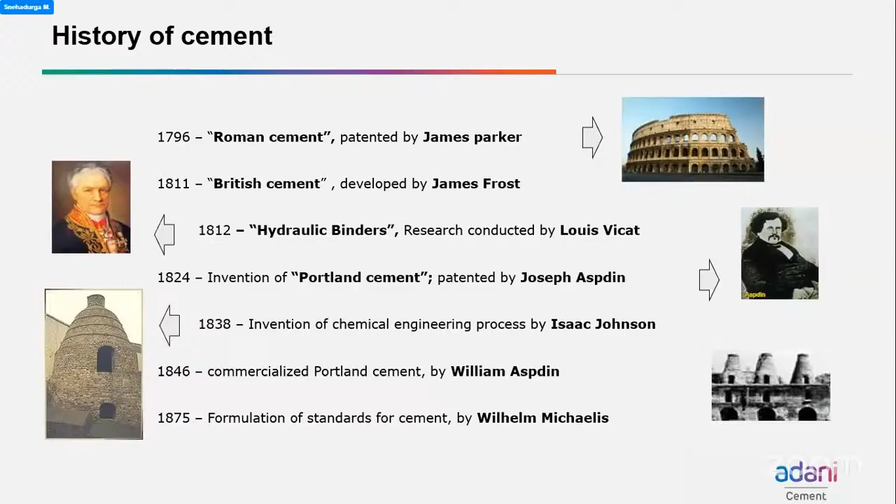Till that time, there was no proper color, no proper setting time, no proper strength, no uniformity. So after 1875, with the formulation for cement, they made some standardization for setting time, strength, color—everything was standardized.

After that, in 1830, they used vertical kilns. Again, in 1885, the rotary kiln was introduced, which used a wet process. Then in 1930, a long rotary kiln was used, also a wet process. Till that time, it was only the wet process.

Again, in 1970, there was a real change to what we personally use in cement today. This real change, or overall process change, happened in 1970 because the short rotary kiln and preheater were introduced—preheater in the dry process. Till that time, they used the wet process, semi-wet process, or dry process. The preheater was introduced, and I'll tell you the advantage of the preheater in upcoming slides.

So before that, we saw this process and the developing technology for cement manufacturing. In the 1900s, they used the wet process with a long rotary kiln, with chains inside the kiln to improve heat exchange. Then after that, almost in the 1950s, they introduced the semi-dry process, and in 1980 they went for a semi-wet process. After that, the dry process was introduced, converting from long rotary to short rotary, and they also introduced the preheater.

The preheater was introduced in 1970, and at that time they used 4 to 6 preheaters before burning any raw materials. For example, if the material is 100% wet condition, burning it directly to dry would require more energy. To optimize the energy, they used the preheater.

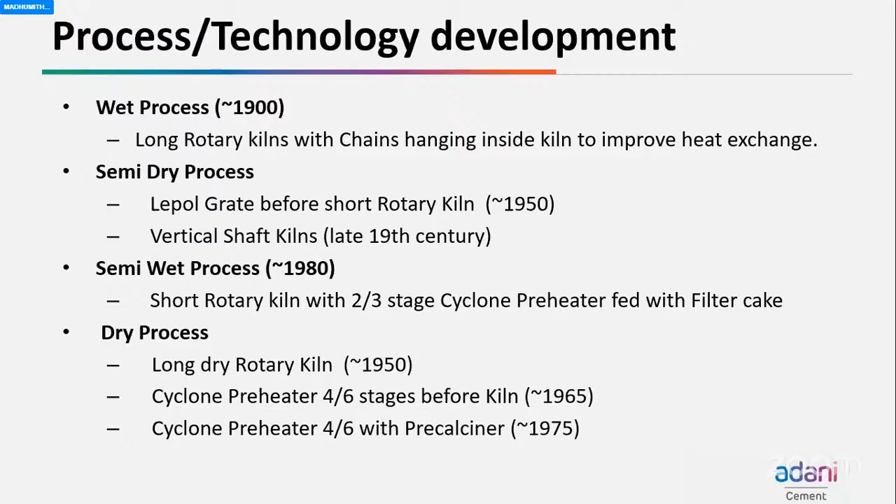The simple process: we take limestone from mining and crushing, then mix clay or bauxite, followed by grinding. The burning of limestone happens at almost 1500 degrees Celsius. After that it's called clinker. Clinker with gypsum, after further grinding, is called ordinary Portland cement, or clinker with gypsum and fly ash is called Portland pozzolana cement. Clinker with gypsum and slag is called Portland slag cement.

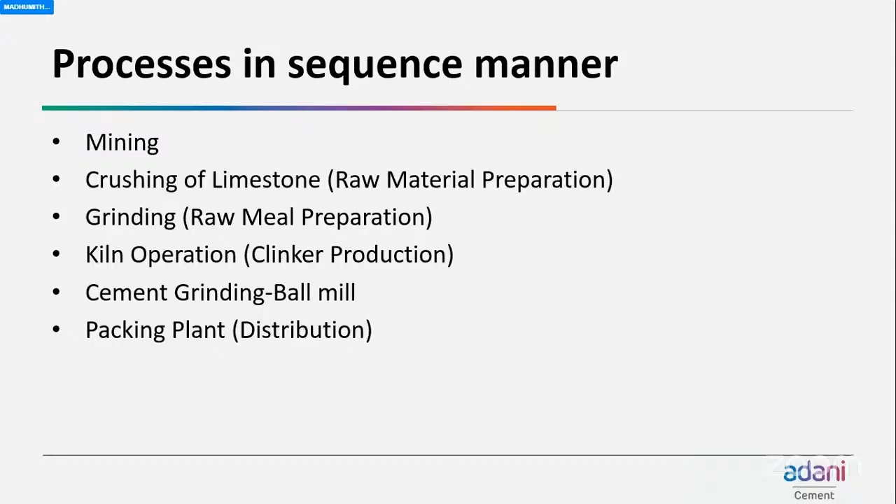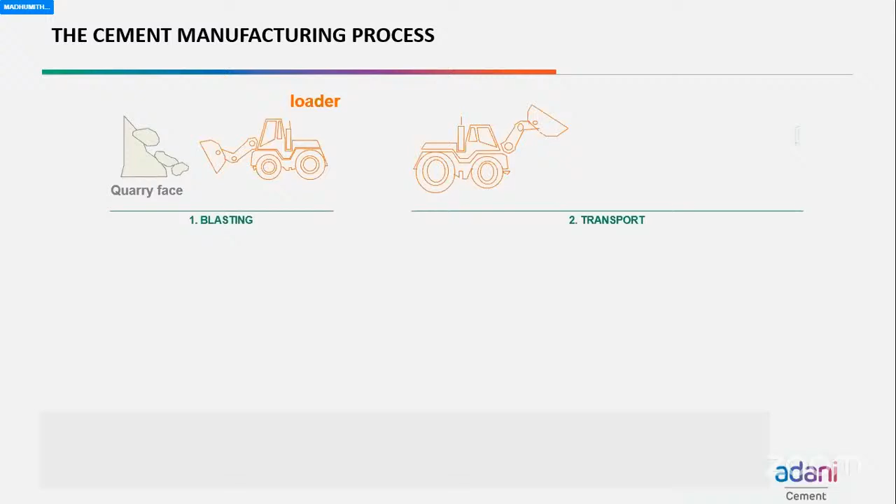After grinding, we go for packing and distribution, maybe in bulk or bags, whatever mode is required. Then we transport and distribute by road, rail, or ship. This is the simple cement manufacturing process. I'll take you through simple steps of how cement is manufactured, for academic purposes, to recollect for everyone.

Limestone is taken from the quarry, then transported by conveyor belt, dumper, or trucks, whatever mode is locally available, depending on the factory-to-mining distance. Different modes are used for quarry to factory and factory to lorry transport. These are the simple concepts of the cement manufacturing process.

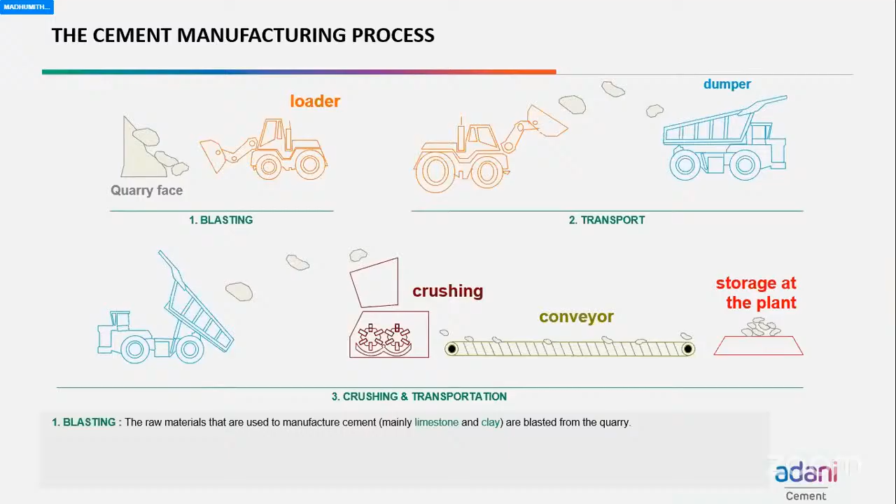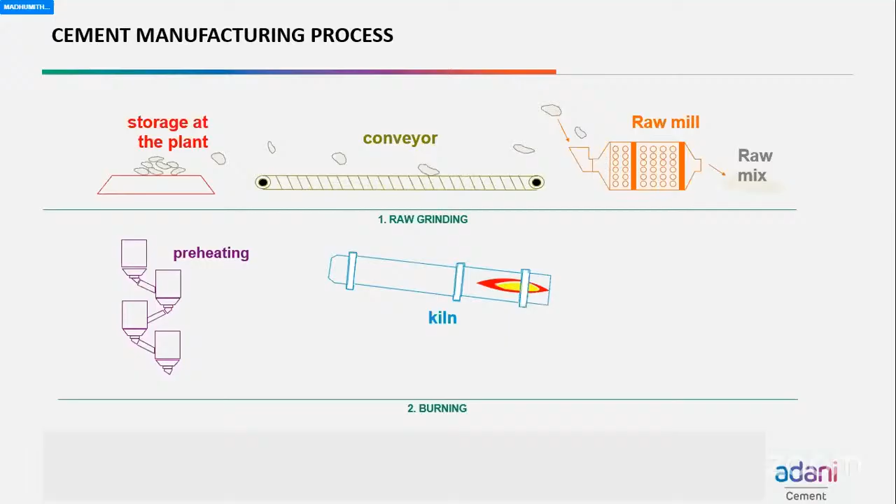We store the limestone at a storage place, then further grind it with clay or bauxite using a raw mill. After powderization, it is fed into the preheaters.

Raw material is fed into the top of the preheater, while at the kiln operation coal or alternate fuel is burned at around 1500 Celsius. Whenever anything burns, hot gases are produced; these heat gases are collected and fed to the bottom of the preheater, reaching step by step.

After drying, the material reaches the kiln where it is completely burned. The limestone becomes like lava - if you imagine any material burned above 1000 degrees Celsius, it becomes liquefied, like a liquid shape. It completely burns and after cooling is called clinker.

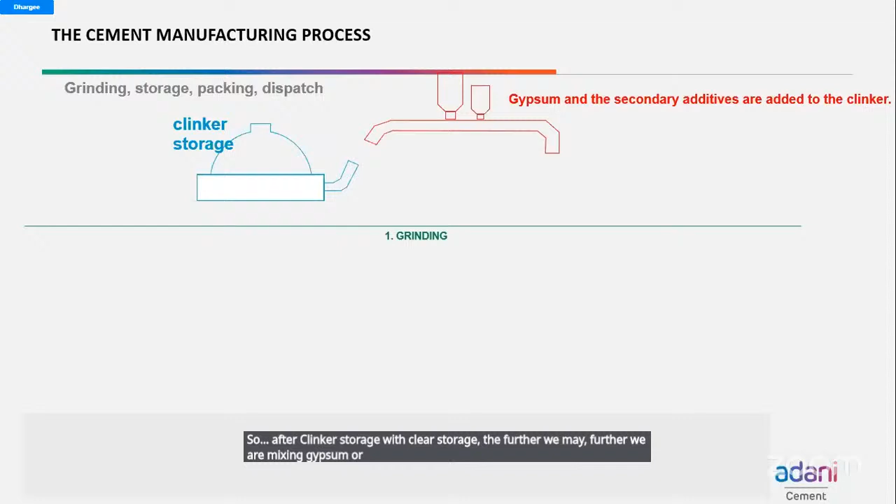After clinker storage, we further mix gypsum with the clinker, then further grind it with a ball mill, crushing it into powder form, then pack it for the market.

What is the purpose of mixing gypsum? It controls the setting time - it is a set retarder, mainly for controlling the setting. That is the purpose of mixing gypsum in cement. It may be 3 to 5%, typically around 3% gypsum added relative to the overall percentage of clinker.

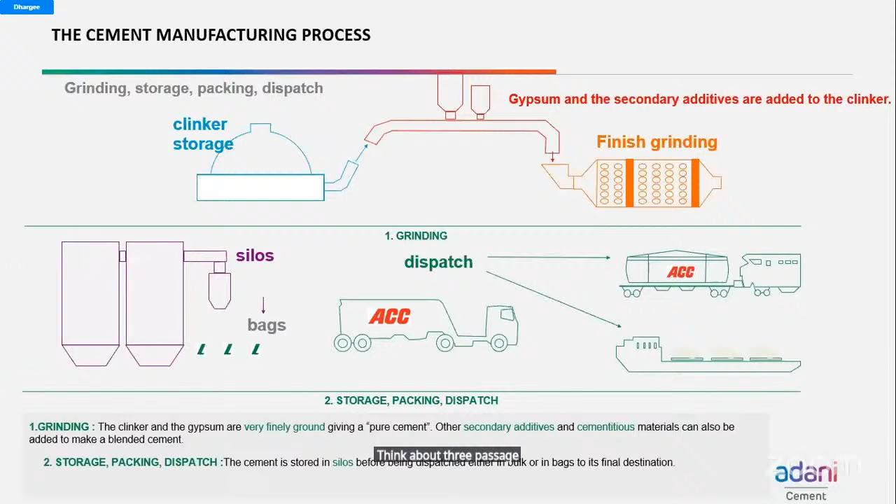This is the simple cement manufacturing process. This is the ball mill - similar to what you would have tested in the Los Angeles abrasion test for coarse aggregate. Imagine it as a big size, with a diameter almost 3 to 4 meters, and the tube length around 6 to 8 meters. It rotates with balls inside, crushing the material into powder form.

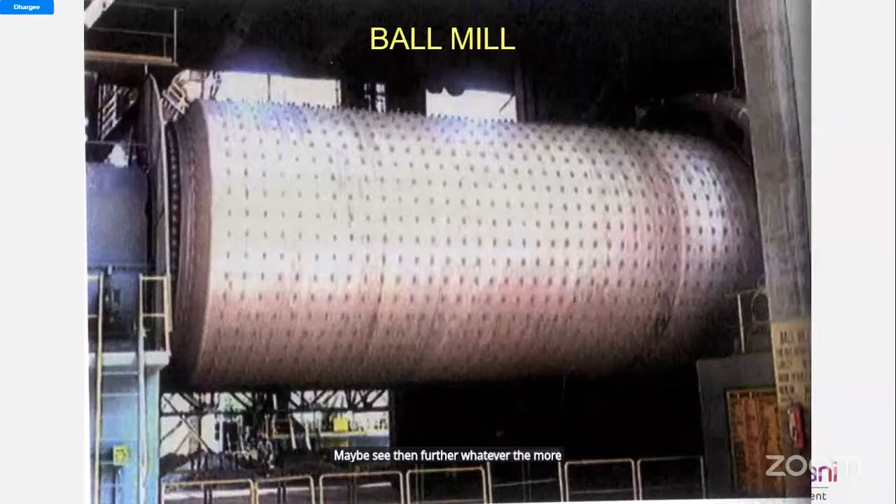The powder form then goes through screening or sieving. The final material goes to the silo, then from the silo it is packed as cement for dispatch to the market. This is the process I want to use to emphasize the importance of the preheater.

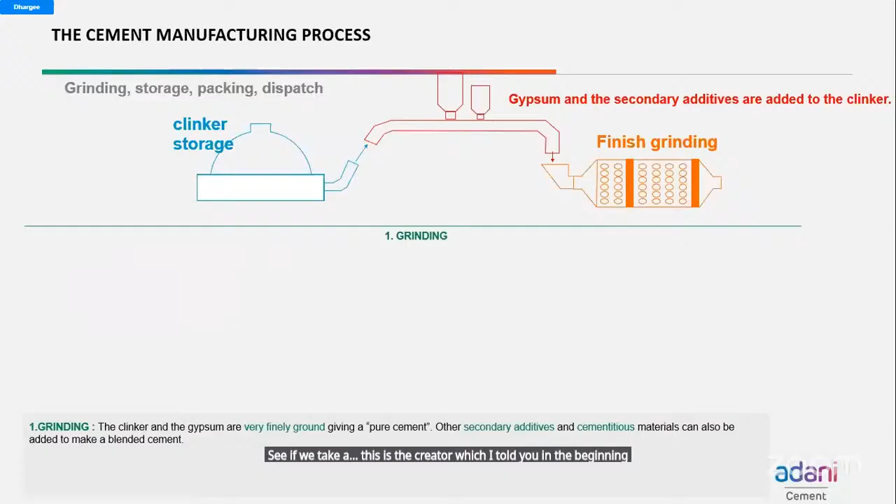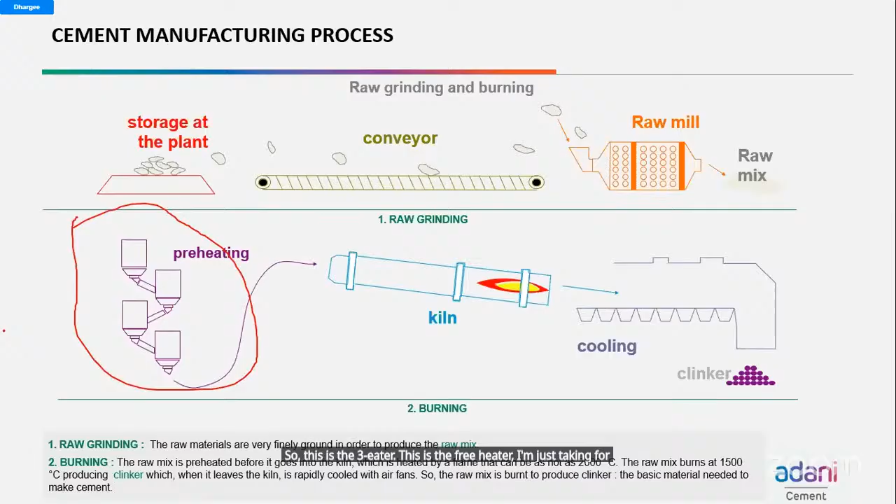This is the preheater which I told you about a few slides before. Just imagine this is the preheater - I'm taking the next few slides to explain what this preheater does.

In this preheater, we burn limestone and coal. The heat gases collected from here reach the area marked in red color, moving from the bottom to the top of the preheater. Wherever the green color is marked, this shows where raw material is fed from top to bottom.

So raw material is fed from top to bottom, whereas hot gases go from bottom to top. It's opposite directions. Because of that, hot gases are induced from the bottom. Then step by step, the raw material, whatever its wet condition, is dried.

This helps drastically reduce coal cost, or energy cost, before burning. In the preheater, the raw material is heated from 300 degrees Celsius to almost 900 degrees Celsius. Then it feeds into the kiln, which is almost 1000 to 1500 degrees Celsius. If you completely burn the coal, it's like a liquid stage. After some time, you spray water slowly, which cools down the raw material, and because of that it forms as clinker.

The clinker is the raw material. Based on clinker and gypsum, we can add secondary material for the cementitious material. Based on secondary material, we add mineral admixtures, and this will change the type of cement. If you add fly ash, it becomes ordinary Portland Pozzolana cement. If you add slag, it becomes Portland slag cement. This is how the cement type changes. If you take OPC, that's ordinary Portland cement, made of clinker and gypsum only.

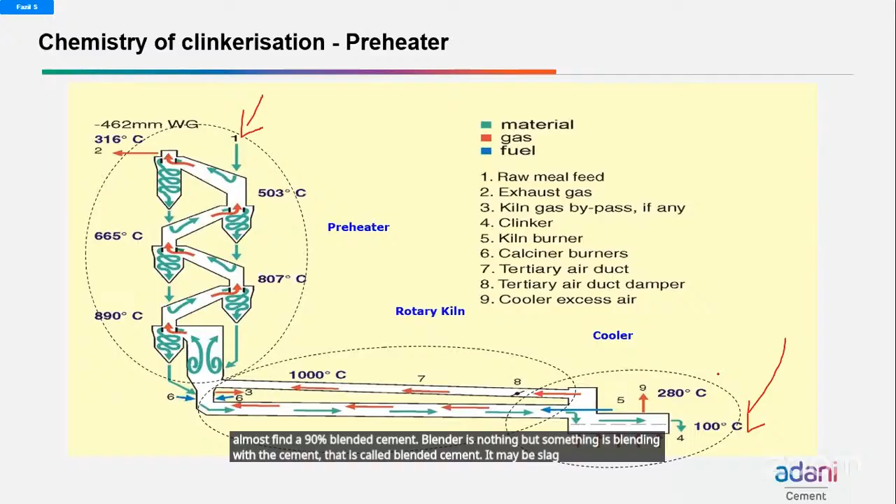Nowadays in the market, you almost find 90% blended cement. Blended cement is nothing but something blended with the cement. It may be slag or maybe fly ash. I don't want to go into detail on the kiln operation.

This is the entire process in cement manufacturing, controlled by the central CCR team, the central monitoring team. This is the place called preheater, and this is the place called kiln operation. The entire thing is controlled by the monitor only. If there are any issues in feeding, RPM, or feeding rate, everything is indicated on the screen. Nowadays all cement plants are made rather mechanical, almost entirely central processing controlled by the monitor itself.

So whatever the rate of feed, rate of feeding, rate of rotation, everything is monitored by the system. Why? Because cement should be uniform. If it starts from day one, say a morning shift starting at 9 o'clock to the next day morning 7 o'clock, the same system is followed, because only then will you get uniformity in the cement process.

That's the reason everything is controlled on the screen itself. If there's any issue, you immediately stop, then somebody goes there to rectify it, then restarts the process. So now the entire cement manufacturing is computerized in closed circuit. There is no open circuit today, no open circuit - the entire cement manufacturing process is closed circuit.

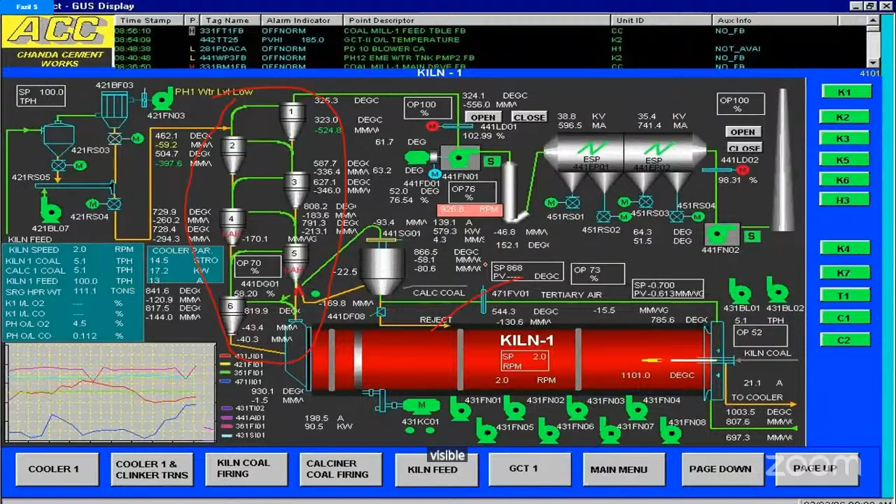Once you feed the limestone, you will get cement. So this is the process. Nowhere can you see the visible process, as we are completely fully closed circuit only.

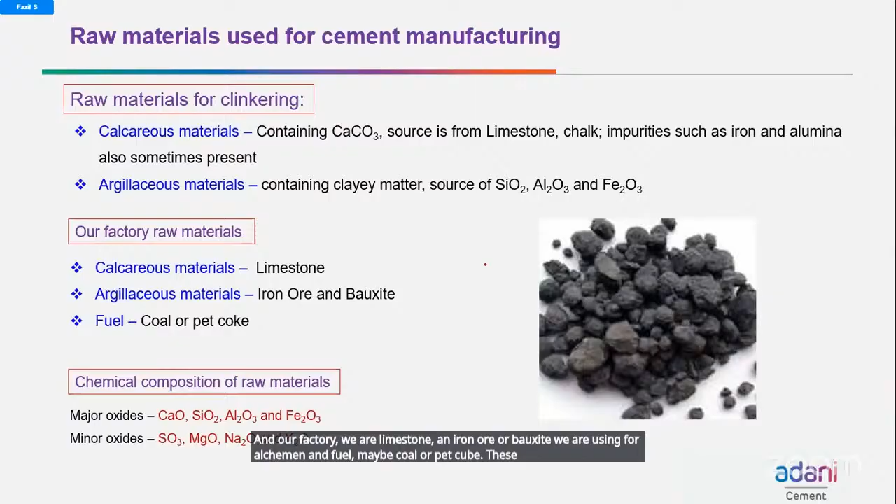So raw material we are using is calcareous material, nothing but limestone, and argillaceous material, nothing but containing clay matter or iron oxide, bauxite we are using. In our factory we use limestone, iron ore or bauxite for argillaceous material, and fuel, maybe coal or petcoke. These are the materials we use in our factory for the entire cement manufacturing process.

Apart from that, microscope and particle size analyzer, chemical testing, and X-ray fluorescence - everything we use at the plant for monitoring and testing, because those days if anything happened...

So in those days, if anything happened to a human, they would go to the doctor, and the only test was a blood sample. But nowadays, if anything happens, they do ultrasound scan, CT scan, all kinds of scans happening, because they want to detect what the problem is in the human body.

Why? Because we want to check both the cases. If there is any deviation, we redo the process for testing analysis. This is the process we adapt across all our plants in India. We have 46 plants in India, and all the plants have introduced this mechanism.

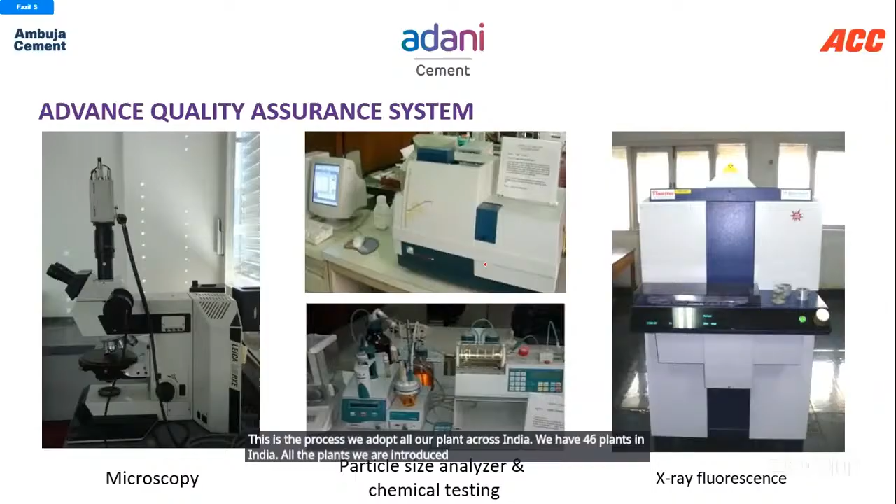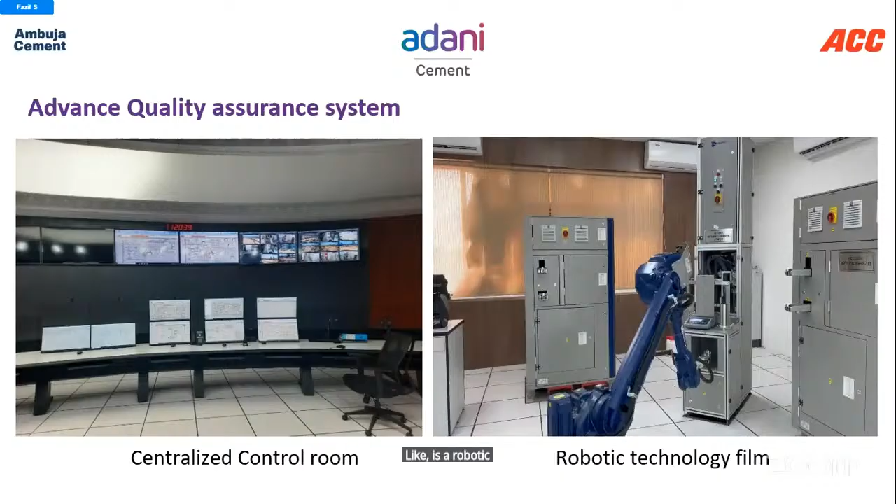We also have a central control room, which I already showed in these images. A few of the plants have also introduced robotic testing machines, because sometimes you never know about human error. These robotic machines are introduced in a few of the new plants, and these are also available for testing our quality. A few other companies also introduce the same technology for testing procedures.

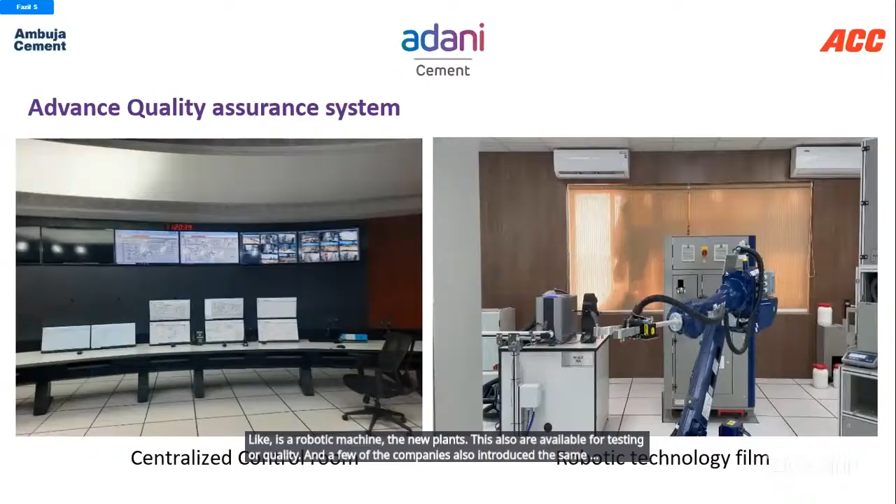So this is the total control chain mechanism I told you about. This is the cement manufacturing process: from quarry to lorry, you crush the raw material, blend it with maybe clay or bauxite with lime, and further grind it. Then comes the rotary kiln operation, which is called burning of limestone, iron oxide or iron ore, maybe with clay. After clinkerization, we go for grinding with gypsum or fly ash. Then we feed it to the silo, then packing and dispatching to the market. This is a simple cement manufacturing process.

There are simply 7 stages, but at each stage we do various quality checks. You might imagine cement quality checks are only maybe 16 or 17, but before the cement itself, we check stage by stage. There are 97 checks we normally do in the quality process of cement manufacturing — even more than 100 sometimes, but basically we do 97 checks to assess the quality of raw material. First, whenever taking limestone for crushing, we check whether with the lime we can make cement or not. So we check 24 checks based on the limestone, then based on the chemical composition.

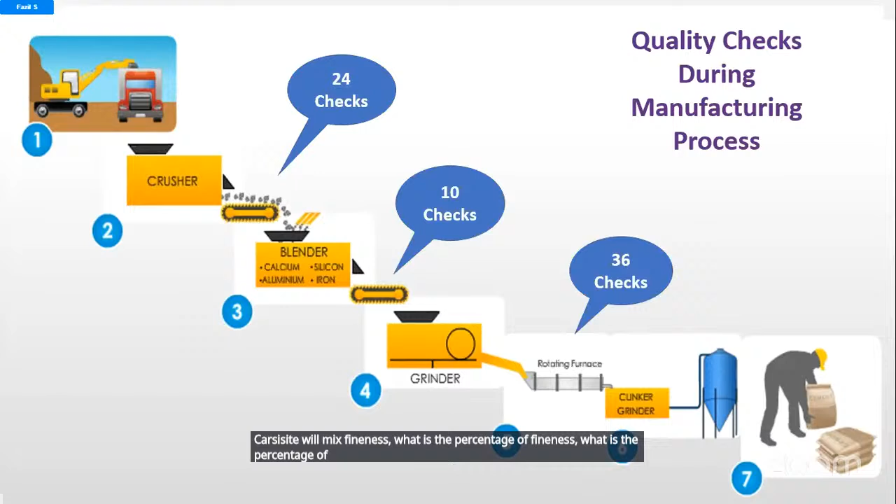We'll mix for fineness — what percentage of fineness we need to keep, what percentage of fly ash we need to add, what percentage of slag we need to add, what percentage of gypsum we need to add. Then based on the tests, we analyze and mix gypsum, maybe fly ash or slag, and further grind after the limestone, clinker and gypsum. Then we check 27 more checks.

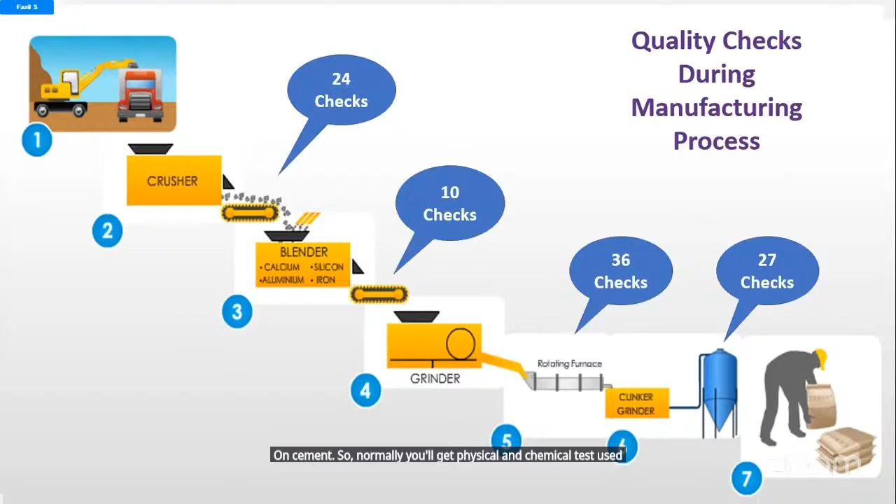Even at the grinding stage, after grinding, before feeding to the silo, and even at discharge and packing time, we collect samples. Every 1 hour we collect samples, make an average, and dispatch the test report. That is the report we give whenever you ask for a cement sample report — we give the test report on cement. Normally you'll get physical and chemical test results on whatever cement you supply, whatever demand you're asking for. So total, we do 97 checks across all our factories to assess cement quality.

There is a myth among a few people who say old cement or concrete was really good, but nowadays whatever cement they're using isn't that good in quality. It's actually a myth. Even you can imagine, whatever cement is made nowadays is far better than the cement of olden days. But the construction practice has changed — that's why issues are happening in the strength of the concrete, not in the strength of the cement. We think strength of concrete is directly proportional to strength of cement.

I do agree, but the process plays a bigger role in the strength of concrete than the strength of cement itself. You can make high grade cement, but with an improper mix ratio, it will be wasted. So it depends on who is cooking — based on the cooking person, it will determine how good your brownie turns out. Maybe your food will taste the same way depending on the process.

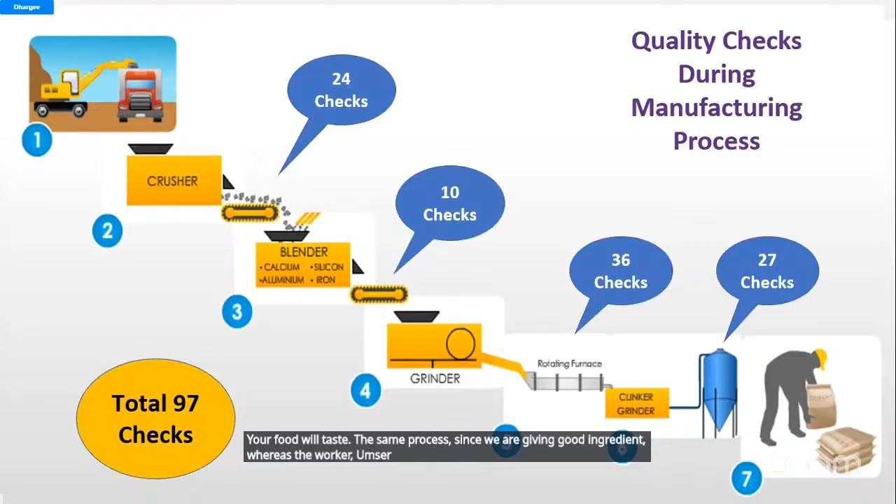Since we are giving good ingredients, it depends on whosoever is making the concrete. It will change the concrete quality. So for quality control of cement, we normally use surface area or fineness, also called Blaine's fineness.

If it is OPC, fineness is 270 to 360 square meters per kg. If it is PPC or PSC, it's around 340 to 400 square meters per kg. Normal consistency may be 27 to 30%. Initial setting time indicates the rate of hardening, and should be not less than 30 minutes, not more than 10 hours.

But we keep initial setting maybe 90 to 120 minutes. Final setting time maybe 180 to 200 minutes. We keep this in our lab for all our cements.

Soundness is the expansion. We have to find the expansion. It is mainly contributed by lime and magnesium oxide.

For compressive strength, we used to check at 3 days, 7 days, 28 days as per IS norms, whereas we check at 1 day, 3 days, 7 days, 14 and 21 days, even 28 days, to check our cement compressive strength. Why? Because today we manufacture cement, and tomorrow it comes to the market, so we want to check the initial strength also on the end product. Though it is not mentioned in IS norms, we have to understand what the strength is before using it.

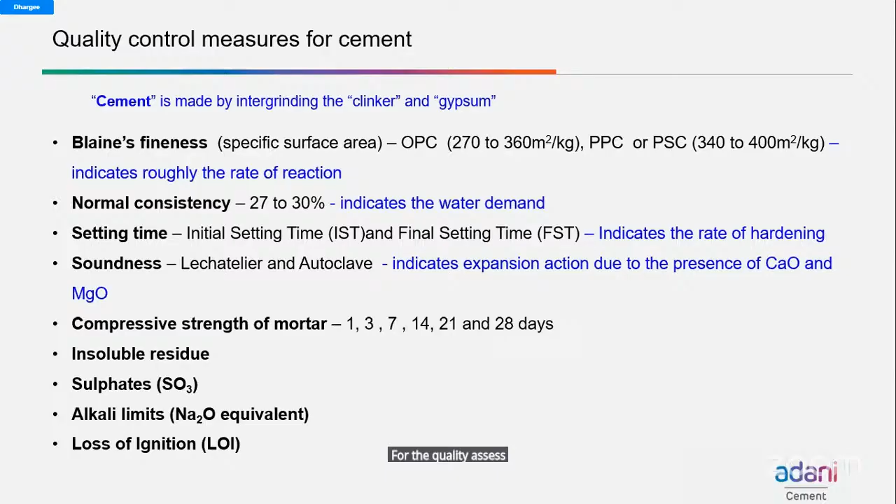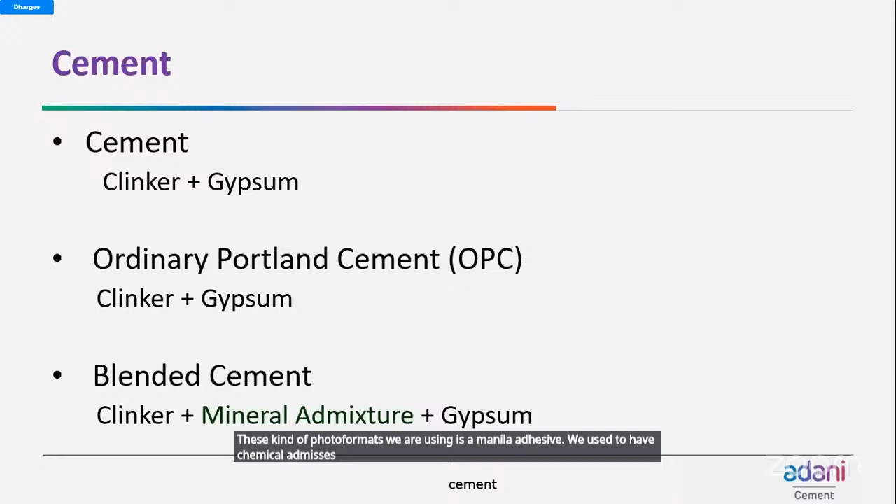So cement is nothing but clinker and gypsum - ordinary Portland cement is clinker and gypsum. Blended cement means we add mineral admixtures - fly ash, slag, rice husk ash, or metakaolin, these kinds of powder forms used as mineral admixture. We also have chemical admixtures, which are liquid type. In cement, we use only mineral admixture for making cement. So ordinary Portland cement is clinker and gypsum.

Gypsum is a maximum of 5%. Portland Pozzolana cement has clinker, fly ash 15 to 35%, gypsum 5%. Portland slag cement has clinker, ground blast furnace slag 25 to 70%, and gypsum 3 to maximum 5%.

Oil well cement is not commonly in the cement market, but based on demand a few companies manufacture it. It is clinker with iron oxide and gypsum. Sulphate resisting cement has a higher percentage of ground slag, clinker and gypsum. White cement has a lower percentage of iron oxide, maybe around 0.4%.

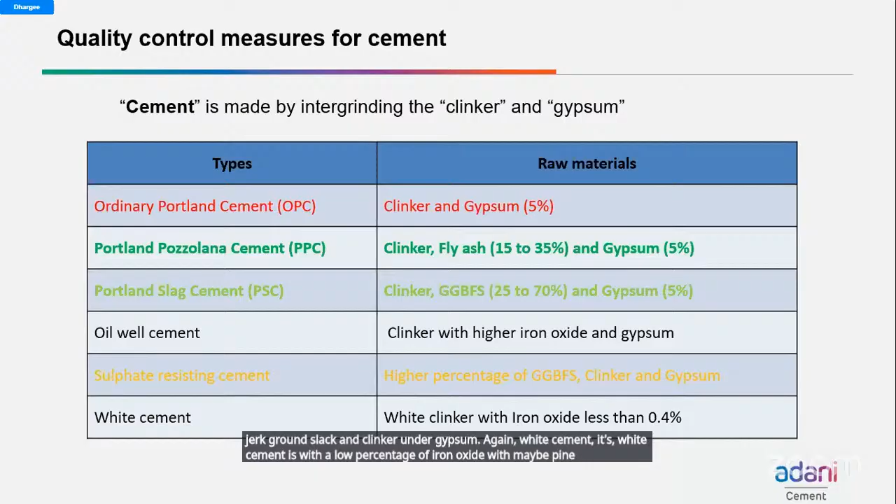This is the simple mix ratio for cement combinations. Even for OPC, ordinary Portland cement, earlier we had 3 grades, but no more 33. Now we have 43 and 53 grades as per IS 269:2015. And Portland Pozzolana Cement, PPC, is IS 1489 Part 1, and PSC, Portland Slag Cement, is IS 455:2015.

Composite cement is nowadays popular in the market. Many people don't understand what composite cement is - they think it's PPC, but we are actually using composite cement. IS 16415:2015 covers composite cement, which is available in today's market.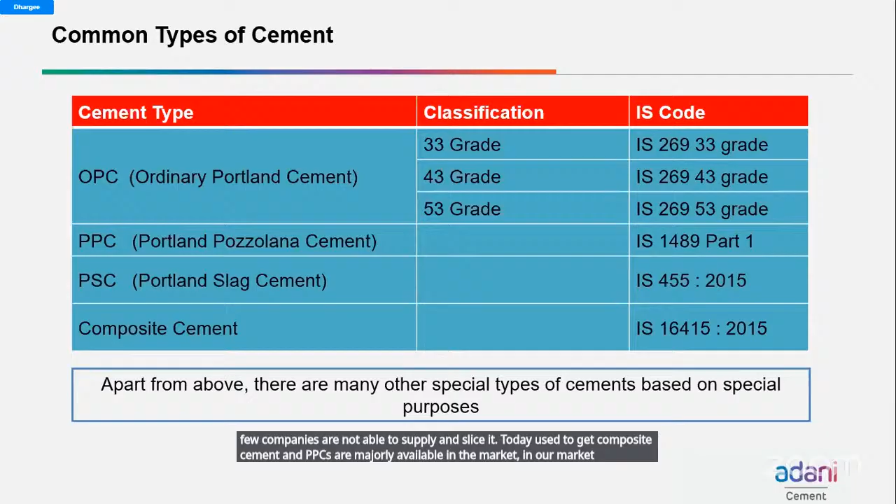These are all the cements available for construction applications in today's market. Major share is PPC, almost 80 to 90%. Nowadays a few companies also use composite cement. I think one or two companies use slag cement, but supply has reduced due to production pressure - since slag cement is cheaper, companies are not able to manage supply, so few companies continue supplying it. Today, composite cement and PPC are majorly available in the market for construction applications, whether concrete or plaster mortar applications.

You can also identify the type of cement based on the IS code printed on the cement bag. If it is OPC 43 or 53 grade cement, you will find the IS code printed in black color. Whenever you check a cement bag, if the IS code is black, that means it's purely OPC cement.

If you find PPC, Portland Pozzolana Cement, the IS code will be in red color. If it is slag cement, PSC Portland Slag Cement, the code may be orange colored. If it is composite cement, the IS code will be white, or maybe dark or light blue.

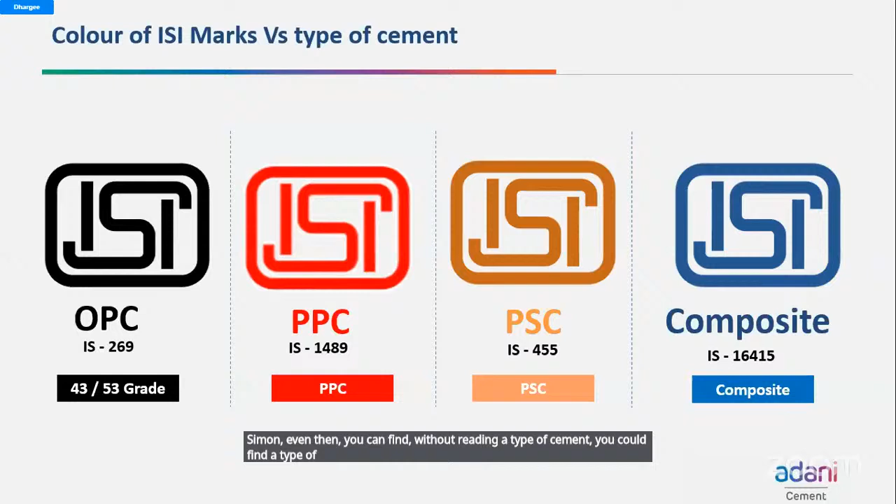Based on that, you could find the type of cement, though it is printed on the cement bag. Even without reading the type of cement, you could find the type of cement based on the ISI mark color. You could easily identify what type of cement it is, right?

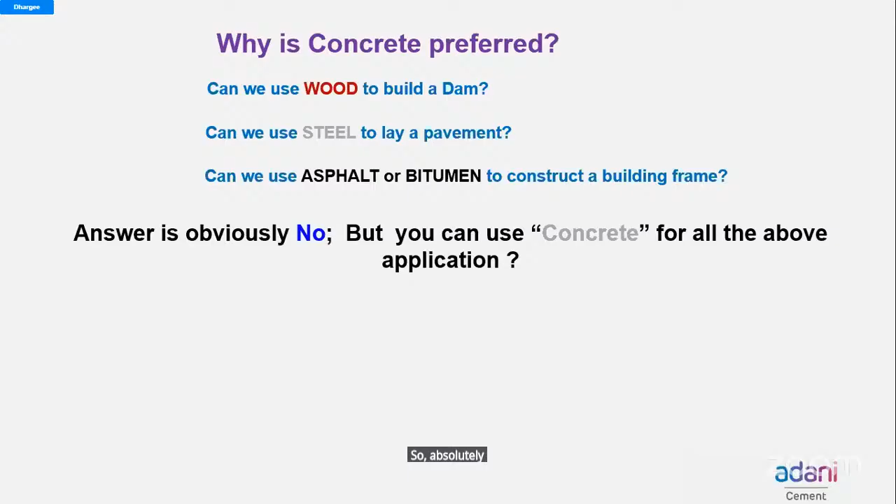So why is concrete preferred? Can we use wood for a dam? Can we use steel for laying a pavement? Can we use asphalt or bitumen for constructing tall building frames? Absolutely no. That is the reason we always use concrete. With concrete we can build a dam, a road, or a tall building. That is why concrete is preferred for all these constructions.

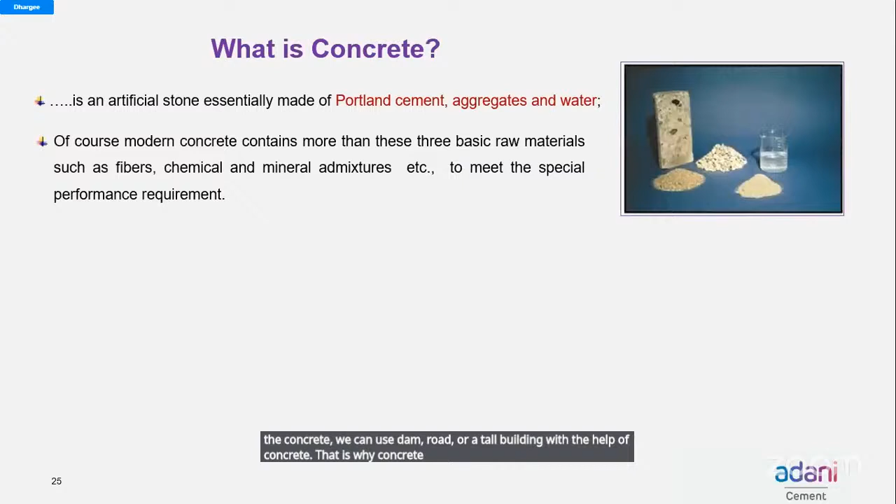So what is concrete? We all know it is a mix of coarse and fine aggregate with chemical admixtures, right? So why is it called Portland cement? The first cement was invented by Joseph Aspdin at a place called Portland in the UK. Cement is derived from the Latin phrase opus caementum. Where cement was first invented, the place was called Portland. That is why we call it Portland cement.

We are making cement with the same type of limestone in India. That is the reason we call it Portland cement, ordinary Portland or Portland slag; we use the same type of limestone for making cement. That is why we call it this.

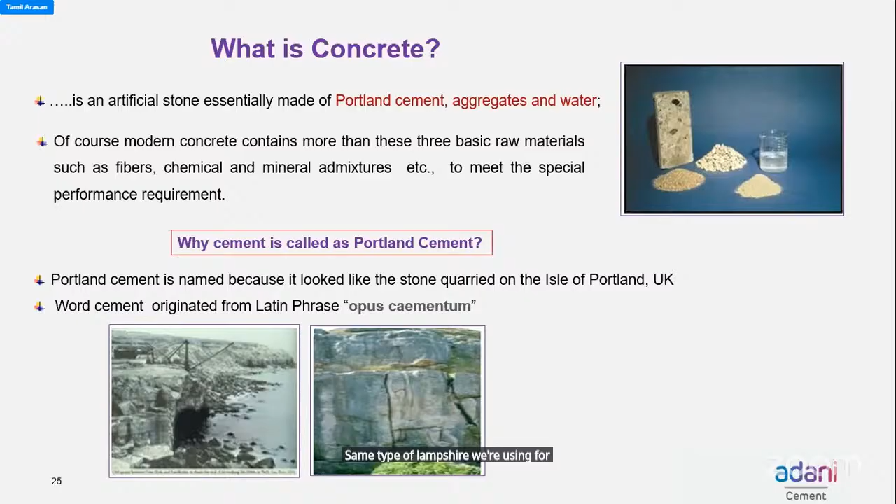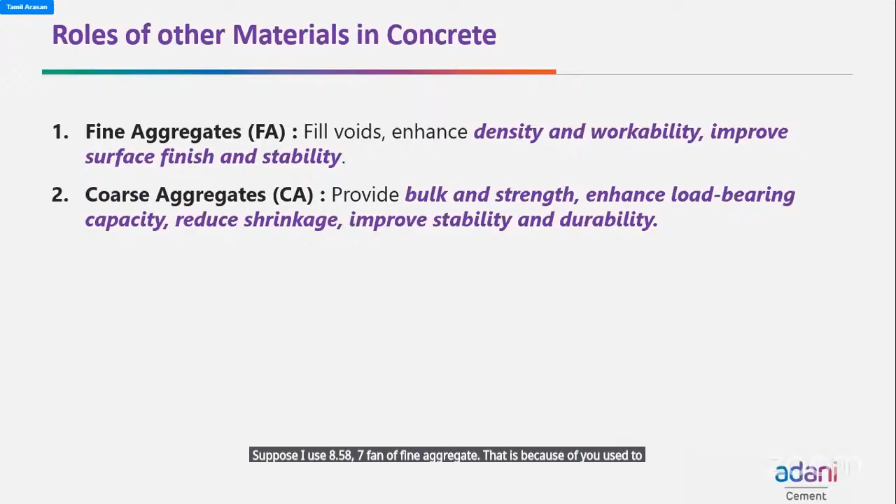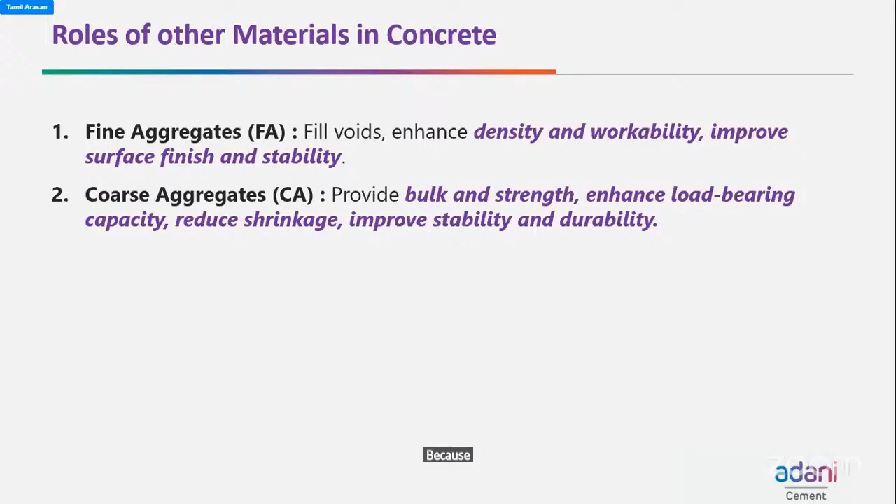That is why you get all these problems of shrinkage cracks and shrinkage issues in construction. People are not using the ratio required for coarse aggregate. Because of that, all these problems are coming up nowadays in concrete structures in normal house construction.

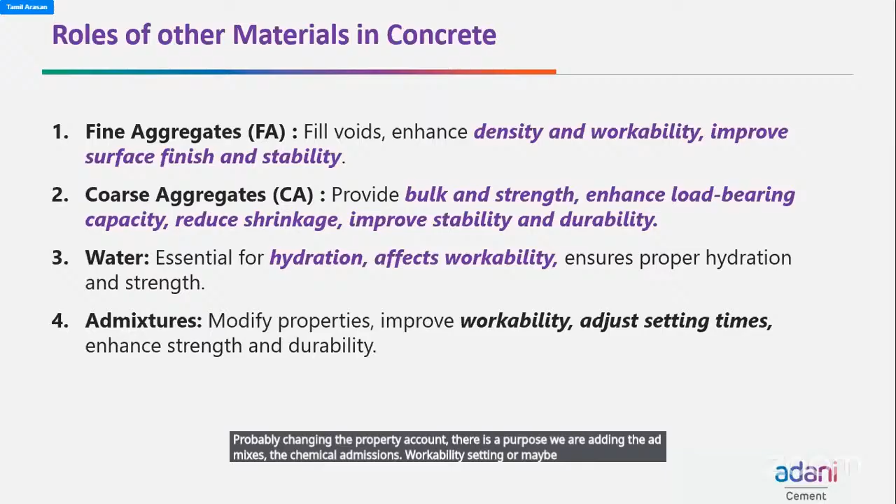Right? What is the purpose of admixtures? Maybe for the workability of fresh concrete. Admixtures change the properties of concrete, maybe workability, or adjust the setting, changing one or two properties of concrete. That's the purpose of adding admixtures. Chemical admixtures adjust workability, setting time, or even strength. Based on the purpose, we add the admixtures.

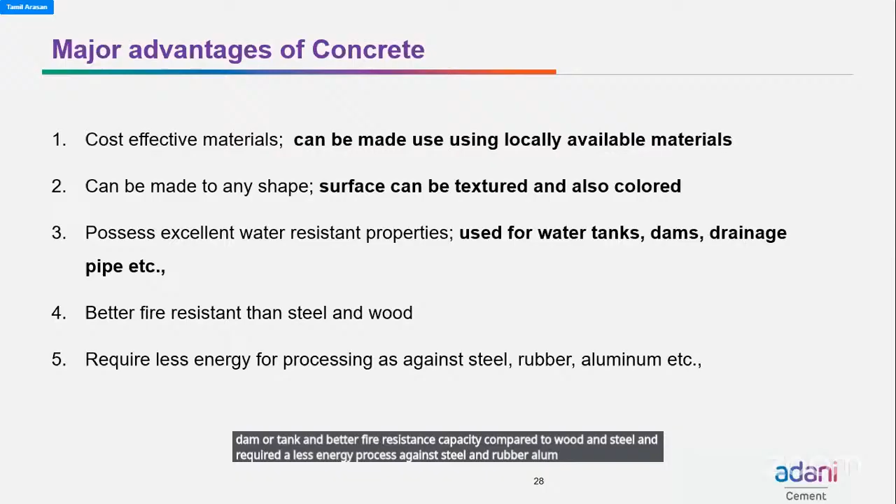The major advantages of concrete: it is a cost-effective material, can be made with locally available material, can be made in any shape and size, and can be given textures and color. It has high water resistance, so you can use it for drainage, dams, or tanks, better fire resistance compared to wood and steel, and requires less energy to process than steel, rubber, or aluminum. These are the major advantages of using concrete in all our construction.

What is the function of cement in concrete? Cement is primarily a binding agent. It acts as a glue between the coarse and fine aggregates, forming a paste in the concrete. That is the purpose of using cement in concrete, as a bonding or binding agent or glue, and it also provides strength, durability, and fire resistance.

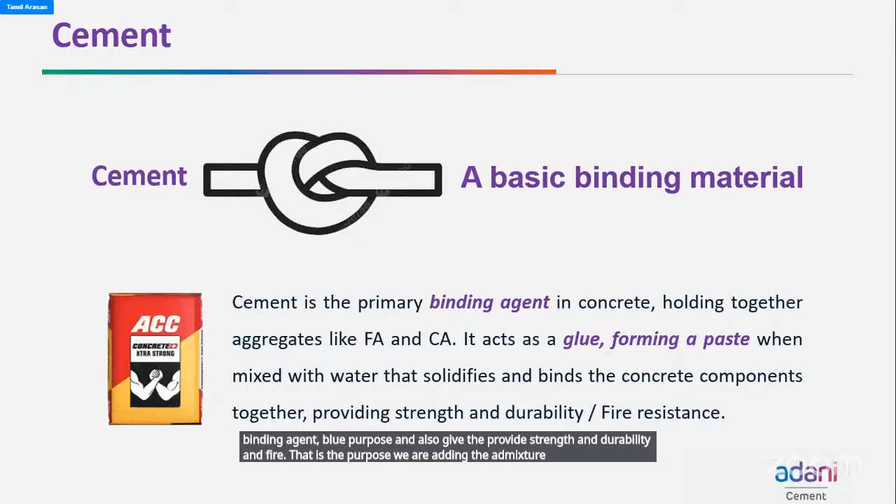That is the purpose we are adding the admixture. We are adding the cement in forming the concrete. That's a major role of cement, right? So what are the advantages? Cement has good plasticity in wet condition. Before the hardening process, you can make any shape and size, with textures and colors, with the help of cement,

and also a strong bond between steel and aggregates, high compressive strength, good durability, and high fire resistance capacity. And also it is economic compared to the volume of coarse aggregate and other materials. Imagine the amount of fine aggregate or coarse aggregate added. If you add this much cement, it's too costly. So a lesser amount of cement will be economical and give effectiveness.

And also it is more flexible. You can meet whatever engineering property requirement you want with the help of cement. Disadvantages: mainly low tensile strength. That is the reason we are adding fiber or steel in the concrete for construction applications.

Cement's weight and volume are also high, so that is a bigger disadvantage. And a major disadvantage is more shrinkage. It will shrink if not cured properly. Because of that, its quality fluctuates and it is prone to cracks or honeycombs. All these problems come because of the shrinkage of cement.

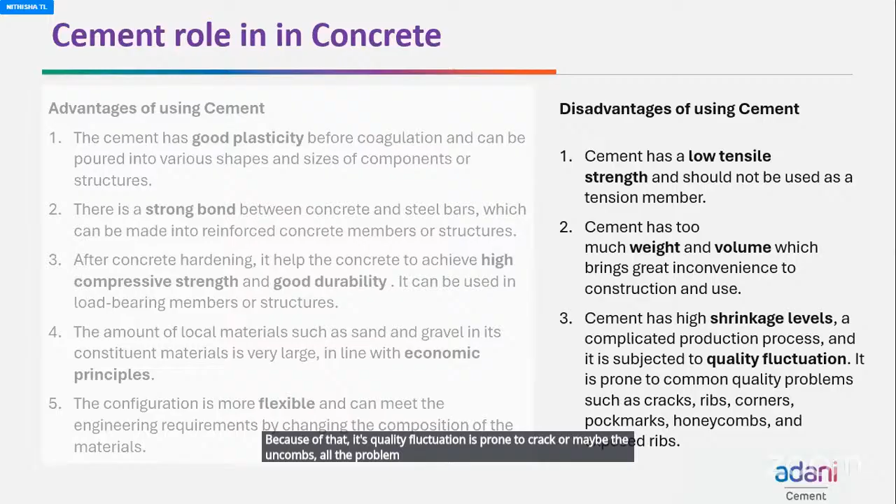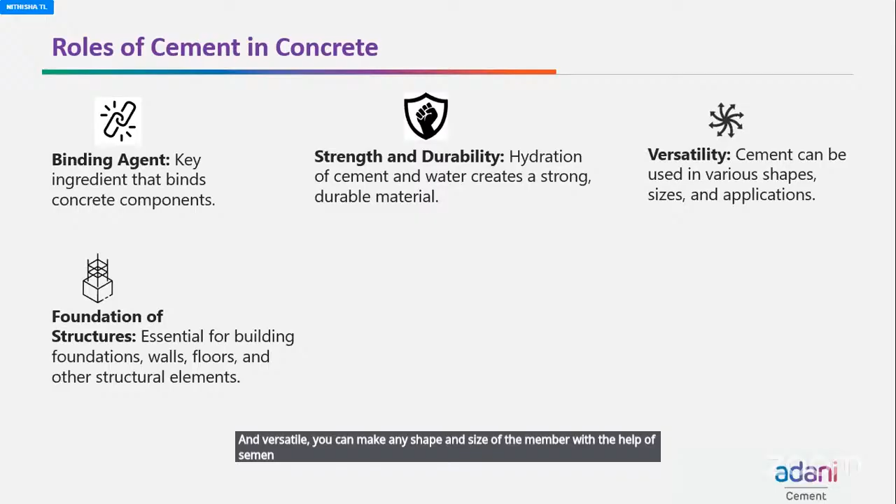Right. So the role of cement: as the binding agent, it is the key ingredient binding the other materials. Strength and durability: the hydration process of water and cement gives the strength as well as durability of concrete in the structure. Versatile: you can make any shape and size of member with cement. Foundation: it is essential to build foundations, walls, floors. Infrastructure: critical construction like roads, bridges and walls uses cement.

Cost effective: it is affordable, reliable, and readily available for large scale projects. And durability: cement structures resist weathering, corrosion and degradation, reducing maintenance. Compared to steel and other materials, the maintenance cost is much cheaper, right?

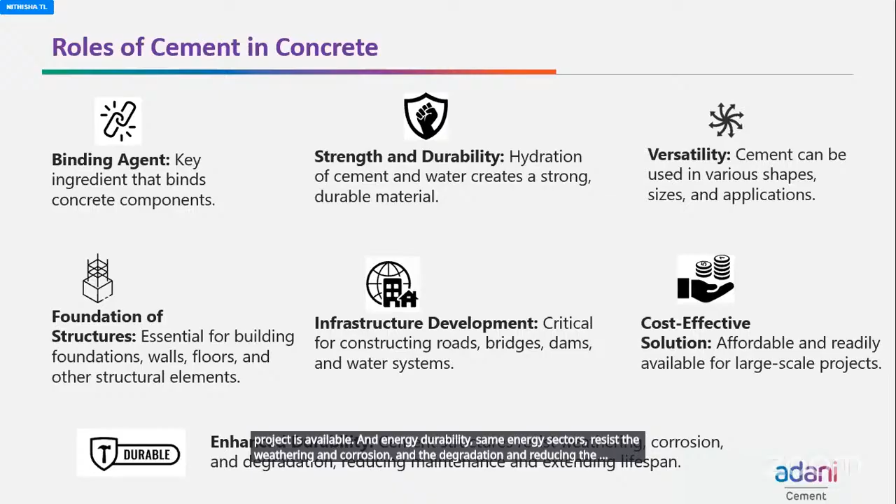Whenever cement is mixed with water, hydration takes place. Calcium silicate gives the C-S-H gel, the binder component. The balance is calcium hydroxide. When you add slag or fly ash, the calcium hydroxide reacts one more time, a double action, giving calcium silicate hydrate again. That is the advantage of PPC compared to OPC for construction applications.

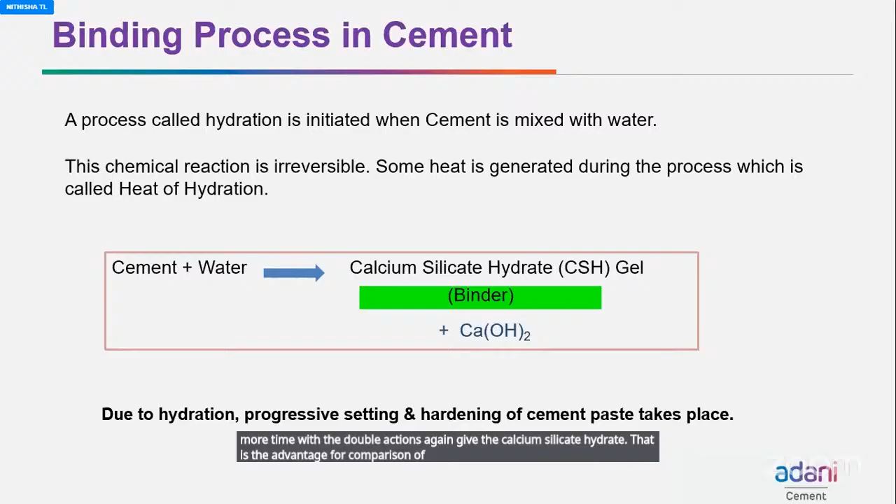There are four major components in cement clinker, the Bogue compounds: C3A, C3S, C2S and C4AF. That is tricalcium aluminate, tricalcium silicate, dicalcium silicate, and tetracalcium aluminoferrite. For example, C3A contributes to setting time and produces high heat of hydration. This is a major disadvantage of too much C3A.

And C3S contributes early strength and also more heat. Wherever the red flag mark is, it is a danger in concrete or cement. In OPC, C3A and C3S are high, whereas in blended cement, C2S is more compared to OPC. That is why blended cement is more durable. C2S contributes less initial strength and produces low heat of hydration, but gives higher strength at a later stage.

And tetracalcium aluminoferrite has no significant impact in cement, but sometimes, with gypsum, a higher amount of C4AF will affect the workability of concrete, majorly slump retention. So this is the range.

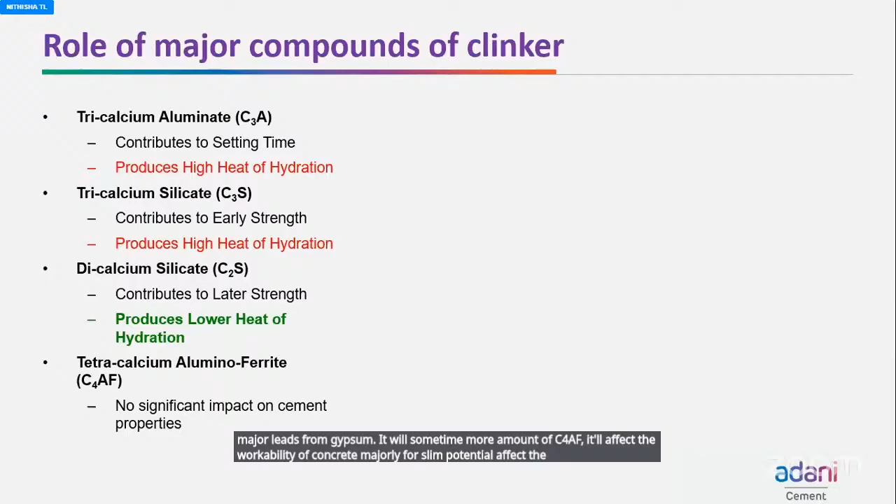If you want to take a photo, you can take it for academic purposes. I don't want to read all the things since time is going on.

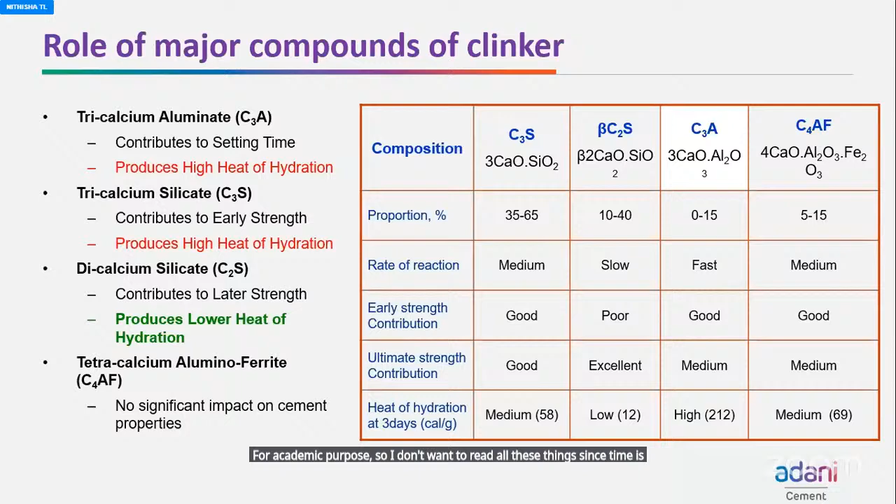So I'll just speed up the session. Right? I don't want to go again, just skipping. If you take an example, anytime you mix cement with water, hydration takes place. After complete hydration, the volume is almost twice. Whatever the size is, for example 1 mm, for simple understanding purposes, after hydration it will maybe be 2 mm; double the size, the volume will increase.

So these needle-type structures will hold the aggregates. If it is more and more old, then bonding capacity will increase in concrete or plaster. Whenever cement is mixed with water, initially it gives more heat. See the graph. There are 5 stages. The first stage, when mixed with water, immediately heat evolution takes place.

Take a simple example. Whenever you add more water to lime, immediately heat will evolve. The same way, since cement is manufactured with the help of limestone, when we mix it with water, heat immediately takes place, maybe within a few minutes. Then after that, stage two is the workable nature. Whatever work we want to do, maybe plastering, concrete, brickwork, you have to complete all the job within maximum 2 hours or 3 hours time.

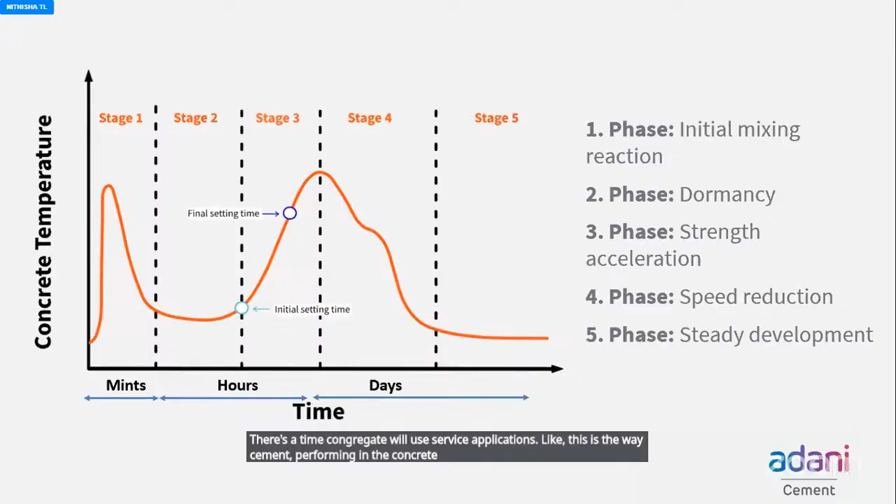In stage one, when you mix with water and aggregates, maybe in concrete, it liberates heat. Hydration takes place. It may be 2-3 minutes, or as mentioned 15 minutes, it will give the heat. Then there is dormancy, stage two. Whatever work you want to do, plastering or brickwork or concrete, you have to complete in this time, before initial setting. That is the reason when you mix with water, all the work should complete before initial setting.

Normally for cement, initial setting time is maybe 90 minutes to 120 minutes. When you mix it with water, the work has to complete before 2 hours. That is why we advise all workers or engineers in the field to try to complete all the work within the stipulated time, maybe 2 hours or 1.5 hours. You have to complete the work.

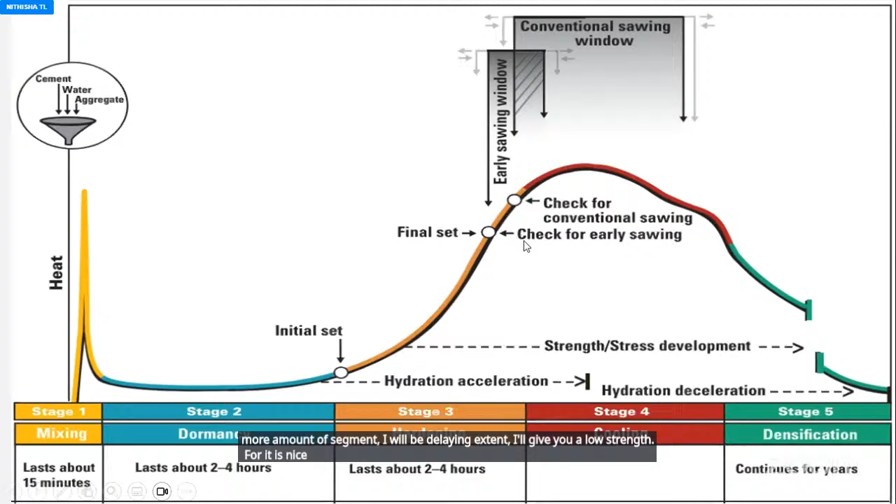After that, it should not be disturbed between the initial setting and final setting time. If you disturb it, again you want to add more cement, and it will delay strength and give you low strength. So after the final setting, the strength-giving process happens. This is the way you have to get it, right? So I'll give a simple example.

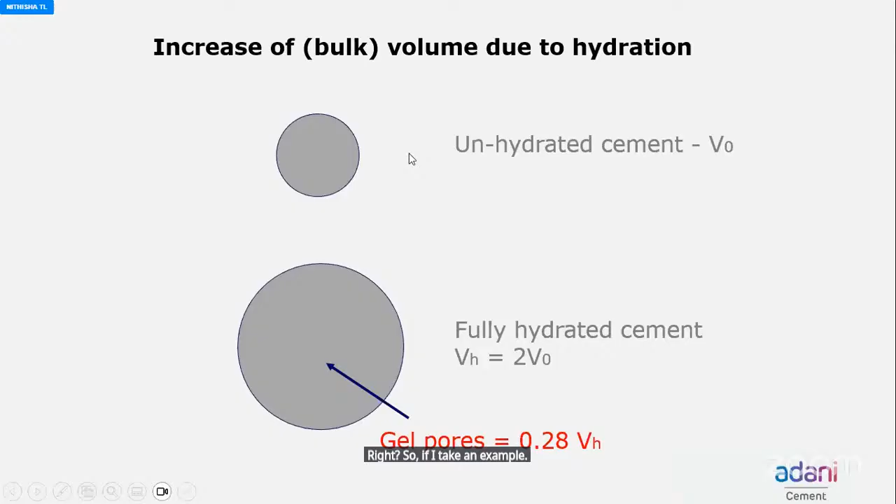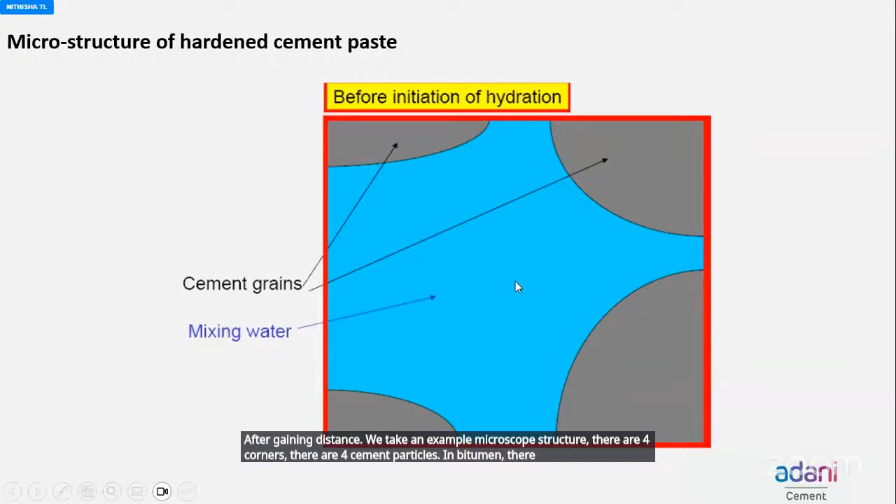Adding a high amount of water cement means the cement particles are too far from each other. The bonding develops over maybe 3 to 4 days, and further over 28 days, but the particles remain too far apart. Whenever making concrete or mortar, try to avoid using more water, because that way you gain more strength.

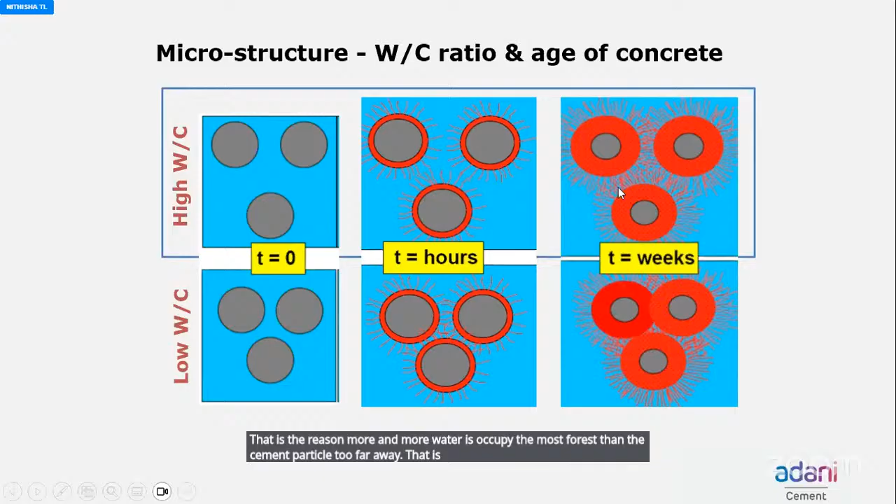We all know that a higher water cement ratio results in low strength. That's because more water occupies more pores, making the cement particles too far away from each other, causing a loss of strength. Whereas a low water cement ratio gives higher strength in concrete.

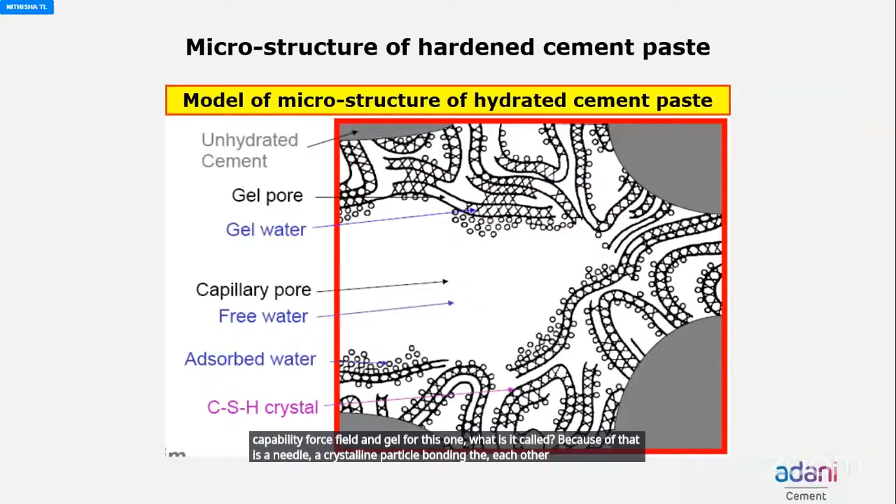This is the way I talked about it. These are the four corners of an unhydrated cement particle. Then gel pore develops, and capillary pore may build up along with the gel. Because of that, needle-like crystalline particles bond each cement particle together along with the aggregates.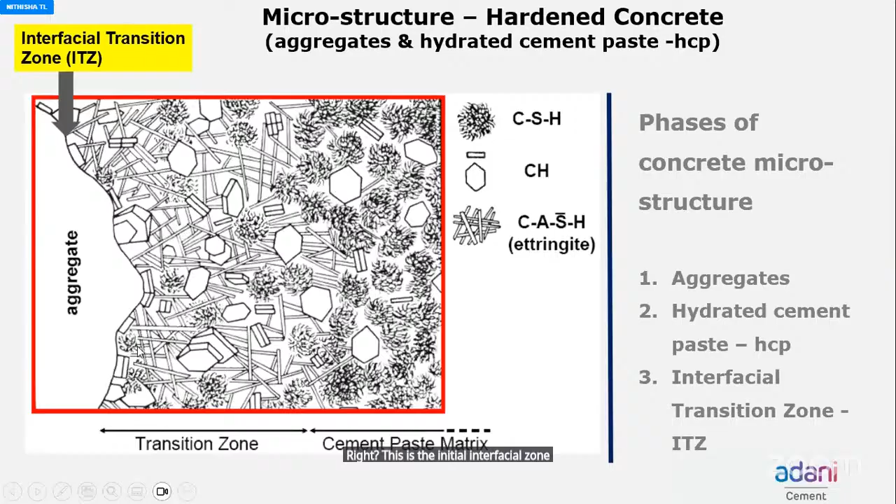I don't want to go too much into all these theories, so I'm just skipping ahead. We've almost discussed everything.

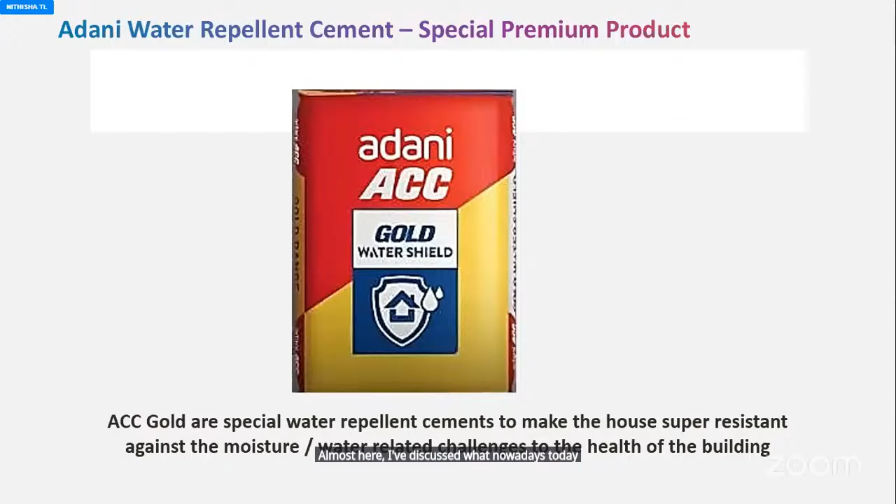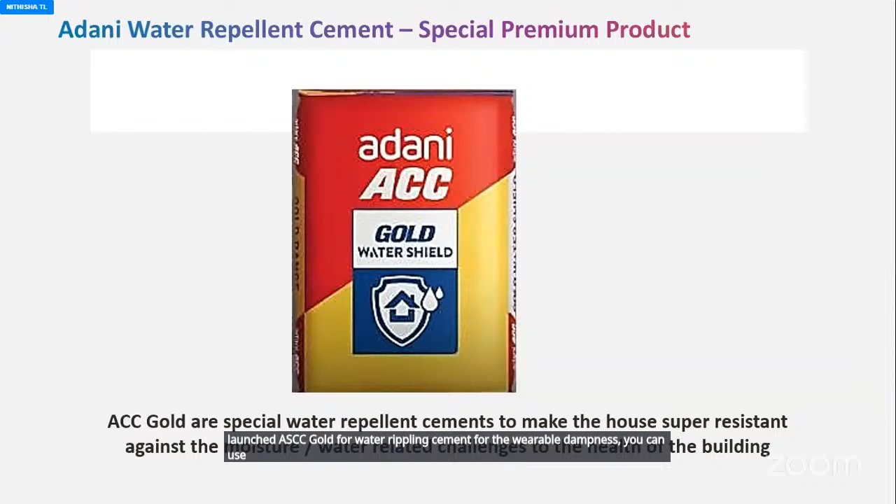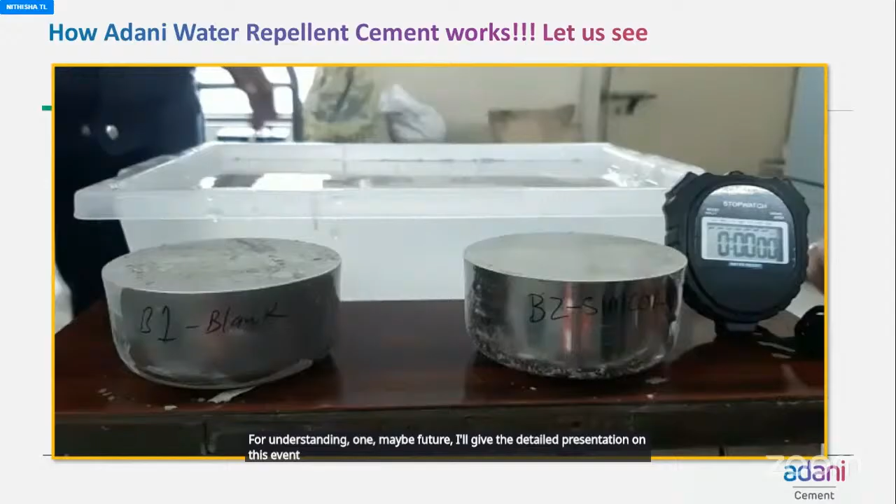Today in Coimbatore, Tamil Nadu, we launched ACC Gold, a water repellent cement. Wherever there is dampness, you can use this cement. I'll give a video for understanding, and in the future I'll give a detailed presentation on this cement, covering its advantages and disadvantages and importance. But for now, I'll give you a simple example.

The first one is normal cement, the gray cement most people use nowadays. The second is ACC Gold, which is now available in Coimbatore, Erode, Namakkal, Salem, and other markets. Let me play the cement video.

This is the first one, gray cement, just immersed in water. Now I'm keeping ACC Gold inside the water too, immersing both cements. Wherever the white areas are, water is going inside. Whereas with Gold, even though white areas are there, the water is not allowed inside the cement.

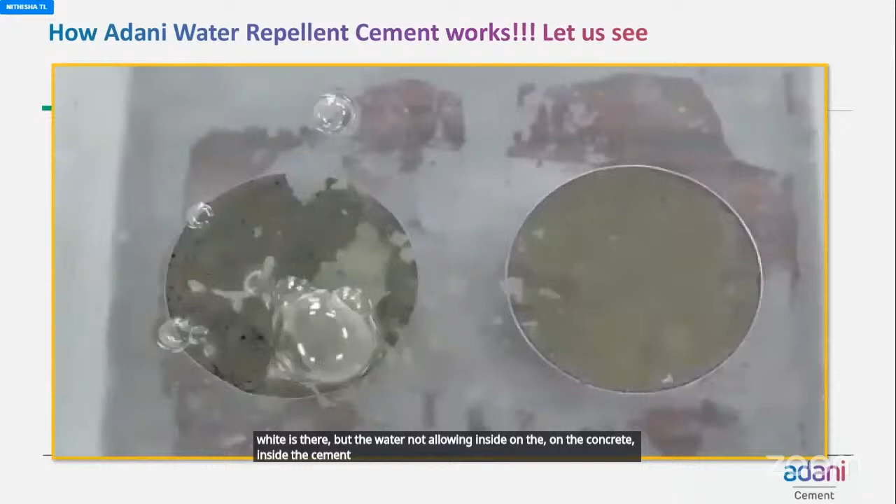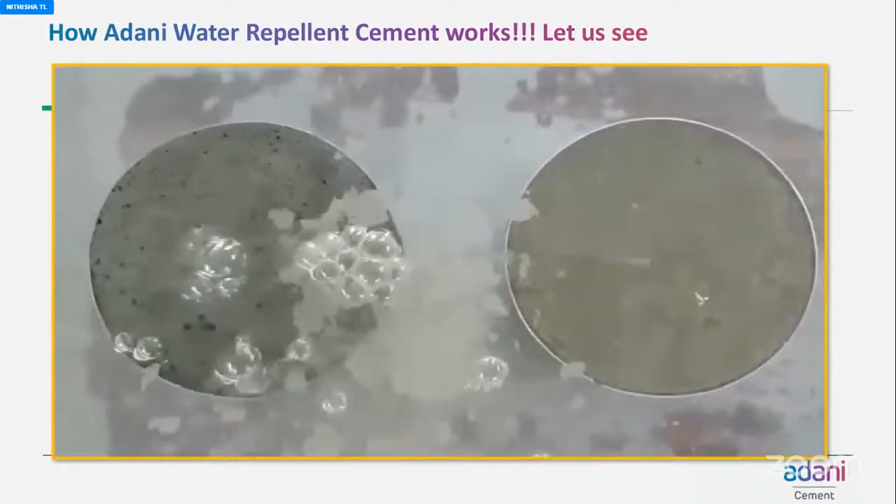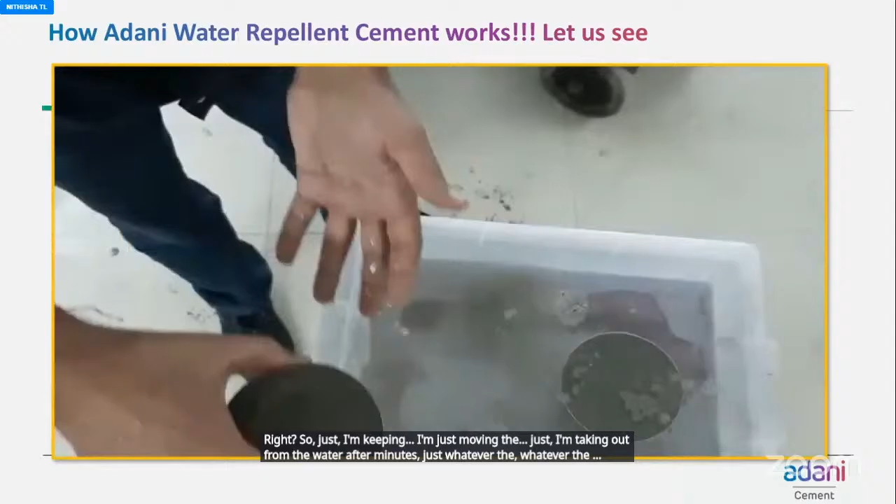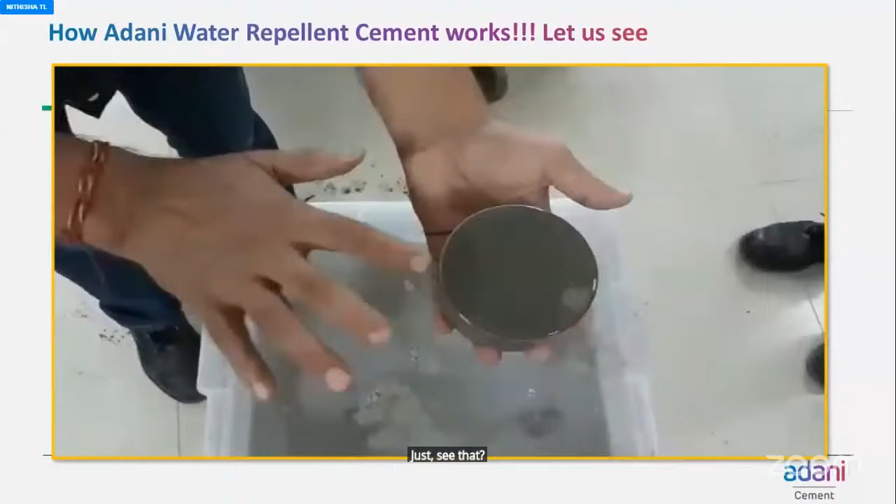See where the air bubbles are, water is going inside. I'm keeping it inside for one minute. Now I'm taking the gray cement out from the water after the minute - you can see it's fully immersed with water. Whereas when I take out ACC Gold from the water after a minute, see here, no water has gone inside.

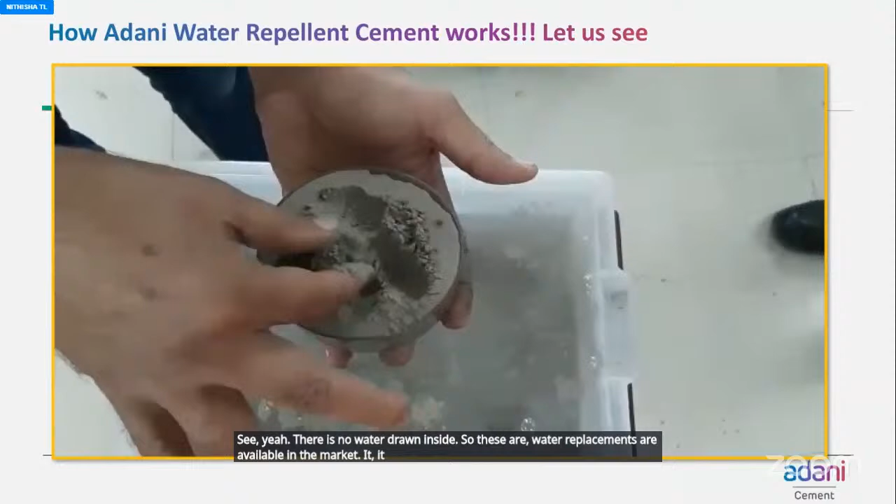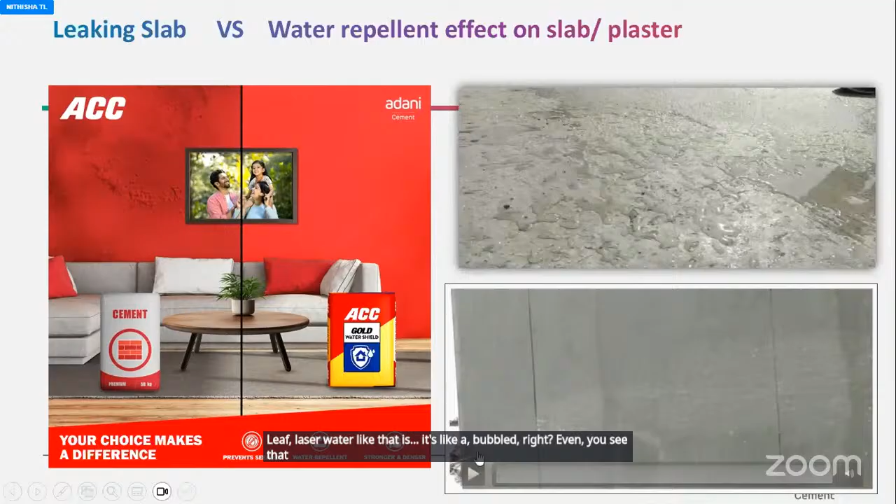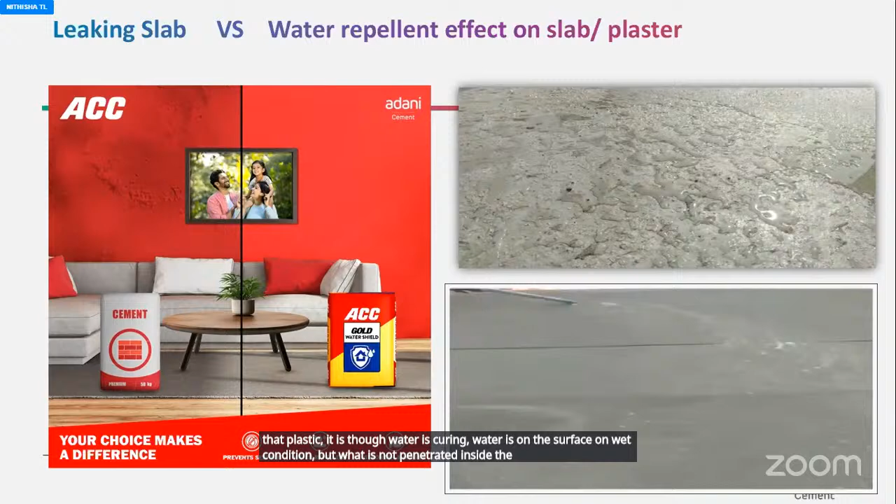So these water repellent cements are available in the market, acting as water repellents on the concrete surface. After making concrete and spraying water on it, you can see how it beads up like a lotus leaf. Even in the plastic stage, though water is on the surface in wet condition during curing, it does not penetrate inside the plaster. Whenever rain comes, it won't go inside. This is the advantage of this cement.

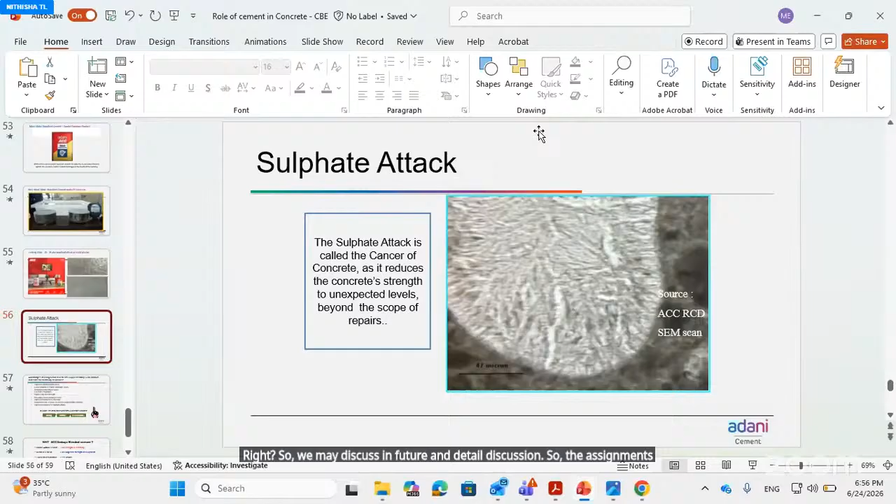We may discuss this in more detail in the future. These cements are available in the market. Thank you so much. If there are any questions, I'll answer them, or else we'll wind up the session.

Any doubts or clarifications required, I'll be happy to answer. I think nobody has a doubt. Thank you so much. Karthik sir, are you there? Some messages are coming up, sir - a nice presentation comment, and one doubt about how to cure it. So there's a question, sir. Tell me, sir, at least one person has asked something. Yeah, tell me, sir. You can tell me, answer sir. What is the question?

What is the question, sir? I have one doubt, sir. How to cure that? What to cure? What is the purpose of curing?

You should understand the purpose of curing - water should not escape from the concrete. Normally we cure the concrete on the top surface, whereas we are not curing the bottom of the slab or beam. So wherever the water losses occur, we want to keep it in a wet condition. If you do proper curing, you don't have any problem - even though you place water, it retains on the surface, it may not go inside.